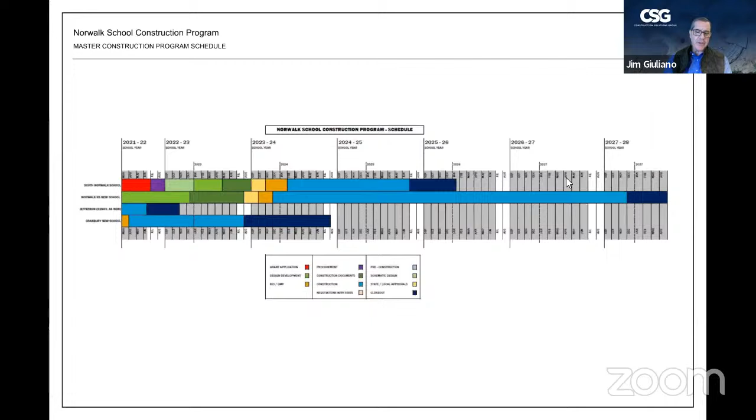The Cranberry project is essentially complete. The school has taken occupancy of Cranberry. We did finish the demolition of the existing school, and right now we're in the process of finishing up site work, which was a new drop-off loop road, parking, and new fields. So there's going to be a new softball field as well as a multi-purpose field, not a full-size soccer field, but one that meets youth level size, in the middle area of the loop drive.

The Cranberry project came about from a renovation project or an addition that Cranberry wanted, to get a cafeteria added on, as well as we wanted to add air conditioning to the project. After we did an initial study and a cost estimate, it was about $17-18 million to do those projects, and it really didn't enhance the rest of the school. It was just really adding a cafeteria and some air conditioning. So we took a closer look at the school and what was really the best use of that money, and decided that a new school built on the same site as the existing school would probably be a better use of the town funds, even though it was more money. It just made sense to replace the old school with a brand new school.

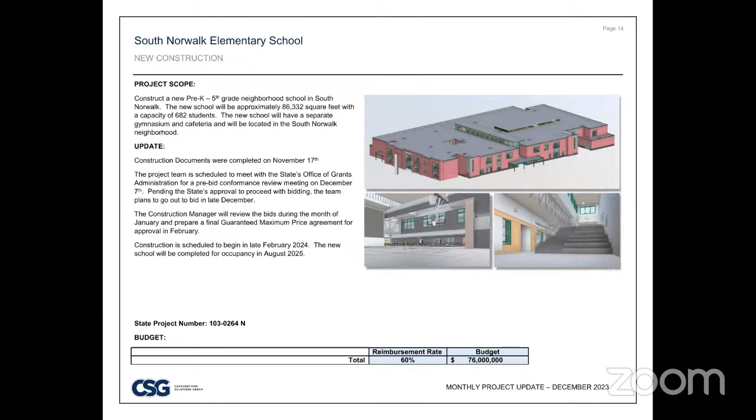I can jump into a couple images now, and maybe that will answer your question. This was an earlier rendering. I wanted to show this one because it's a view of the entire building and kind of the massing, the shape of it. Below are a couple snapshots inside. If we jump to a couple of these renderings, this would be the main entrance to the school. On the left, where you see the canopy, this canopy is the main entrance. On the right here, this is the entrance to the cafeteria.

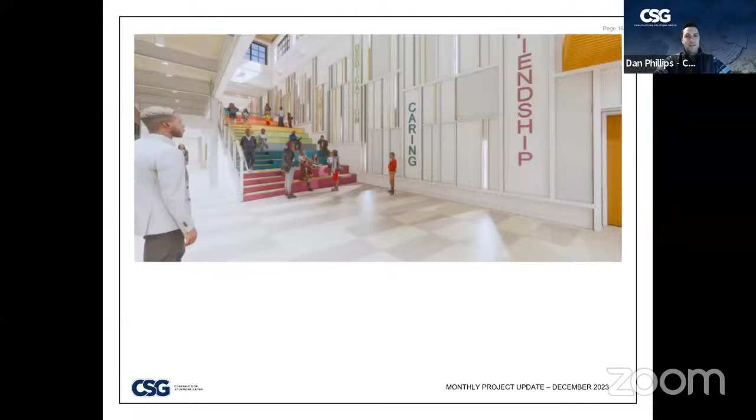This would be the main rendering from the inside of the building, the main stair as you walk through that main entrance to the school. And that's really all I pulled for this meeting.

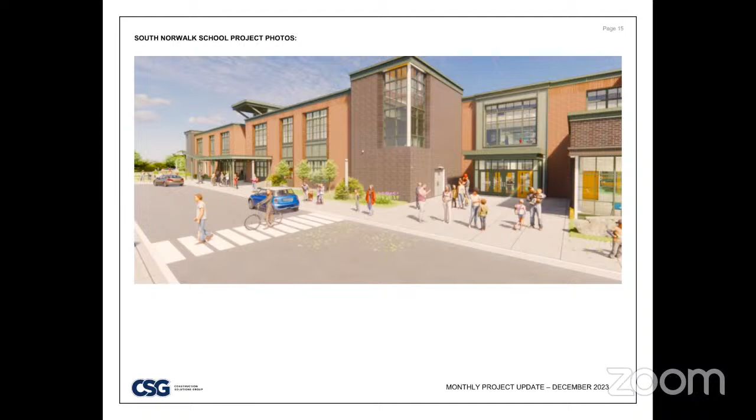I'd like to reiterate my point. Compared to some of our more recent construction, this is quite lackluster. I think it's important that anything we do, we promote equality throughout the city, and that we make sure we are building buildings that are all at the same standard. So even with the three pictures you showed, I'm quite concerned with the lack of beauty and awe these renderings have compared to some of our more recent constructions.

So Dan, these are not completely final renderings? These are final. The project's gone to bid, right? So it's not final. No, it is final. It's final in terms of this is what they are building. This is what the building is going to look like. They are final because they go to the meeting tomorrow. If I heard correctly, they're having the meeting tomorrow. So this is what the building is going to look like.

I don't know, other people might not care or might not have an opinion, but I think it says something. It says something to people that look like me. It says something.

Mr. Freyer: I think I understand what Nicole is saying, but I think part of what we're looking at here is kind of a distortion of what we would actually see. This doesn't look, to me anyway—I'm not an architect, I'm not a designer—terribly different than the description or the pictures of Norwalk High School, just different angles. I think also we're not looking at the inside, and one of the presentations we had seen early on was that the inside of the building was fairly distinct. And looking at the glass here in the front, we had a conversation about that several months ago, where that was kind of innovative, and you don't see that too often.

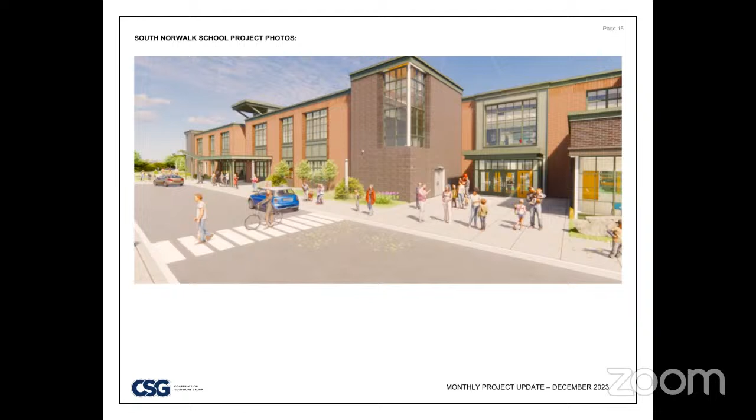Nicole, thank you for your comments and for bringing this to our attention. One thing I want to add is there have been a lot of talks among the Common Council and this committee that we feel strongly it's incumbent upon us to do everything we can, as a city and council, to make this the best school it can be, and to make the area around it the safest and most community oriented. The Public Works Department is involved in improvements around the area, and Transportation, Mobility and Parking is working on traffic, walkability, and safety issues. Thanks for bringing this up. I think we continue doing some research offline and come back to talk about it again next month, if everyone's okay with that.

Okay, Dan, you want to move on?

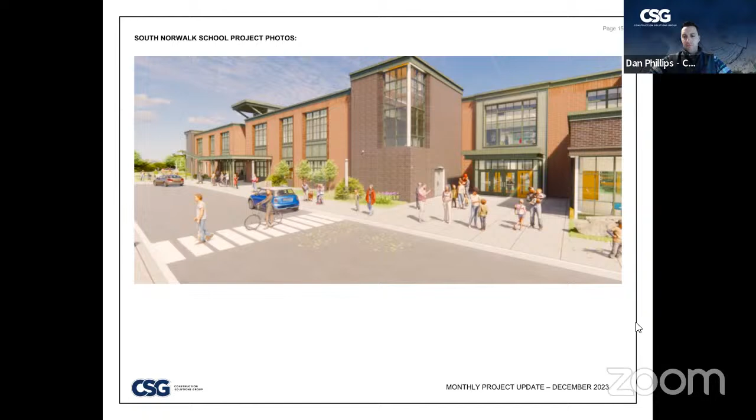Yep, and just before I jump to Norwalk High School, I want to add to Jim's point that this is a single snapshot of the building. We do have renderings from a number of different angles, and we'd be happy to share those or set something up with the design team if that's desired.

Can I just say something about that? On some level I do agree with Nicole that looking industrial for an elementary school is very different than looking industrial for a high school. As much as possible, we could bring some kind of joy to it, and not feel like we're creating a factory system, churning out students as a teacher, which isn't really a great look for any of us. So if there's any way to add a little more joy to it, that would be great.

Thank you for that comment.

Okay, so quickly, Norwalk High School P-TECH update. The construction documents for this project were completed in September. In October, we met with the state for our pre-bid conformance review meeting. We received approval to go out to bid on November 4th. Since then, the project was put out to public bid on November 20th. The current bid due date is January 4th of next year.

From there, the construction manager, it sounds like we're following a similar schedule to South Norwalk at this point. In January, the construction manager will review those bids and prepare a GMP for the project, and that's what will be put forward in February for approval.

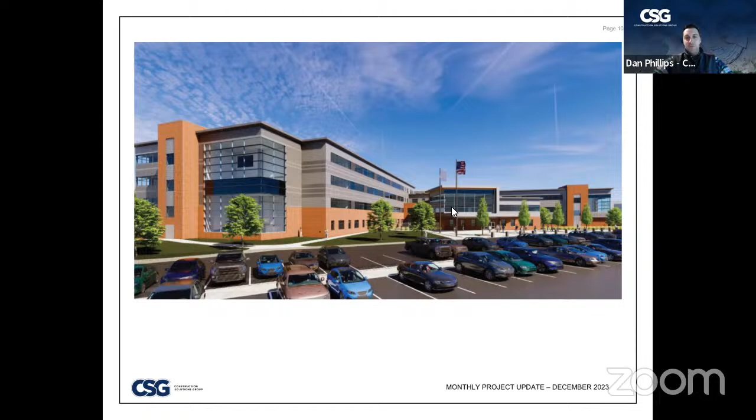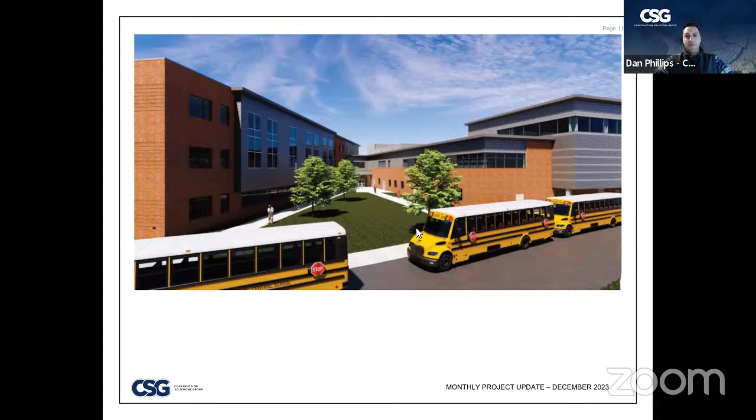Here's a view from the main parking lot. To the left is the Norwalk High School wing, and to the right is the P-Tech wing. In the center is the main entrance with the media center right above it. Off to this side is the school bus drop-off. You can see in the background an entrance that leads right into the common area of the school, at the center. And this would be the rear of the building along King Street.

It's shown here without vegetation, fencing, and other items that would be put in place, but based on community feedback, we understand the importance of that. So it will not be this visible from King Street, but this rendering is intended to show the design of the building.

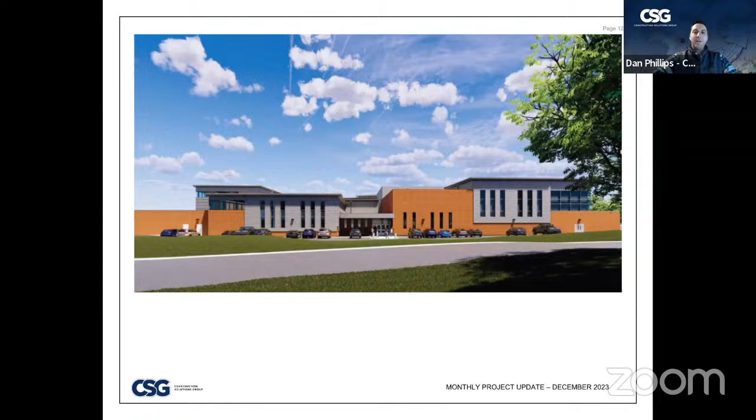And that's the last image we have here for Norwalk High School. Just to recap, the bus drop-off was over on this side to the left of the building, and the rear is the last image I showed. You can see from this picture that it is screened with vegetation along King Street.

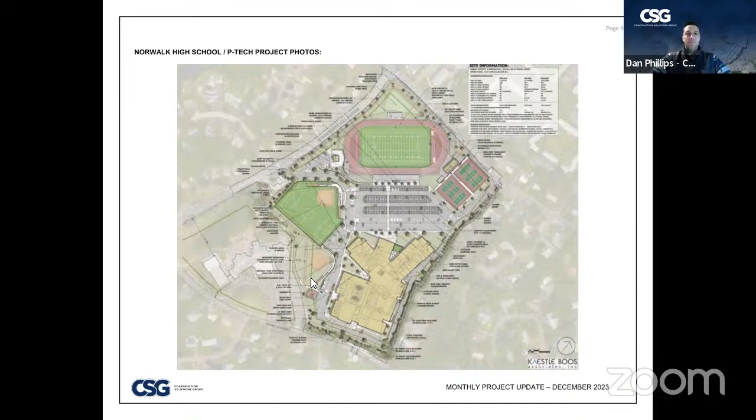Nope, doesn't look like it. I think we more or less covered the Cranbury update, but real quick, a recap of what Jim said earlier.

The school has been occupied since August of this year. After the building was occupied, they demolished the existing building and began to prepare for the new parking lot and field. That parking lot was completed December 18th. Currently the construction manager is spreading topsoil, placing clay on the infield, and installing fencing around that area. The field will be seeded and completed in 2024.

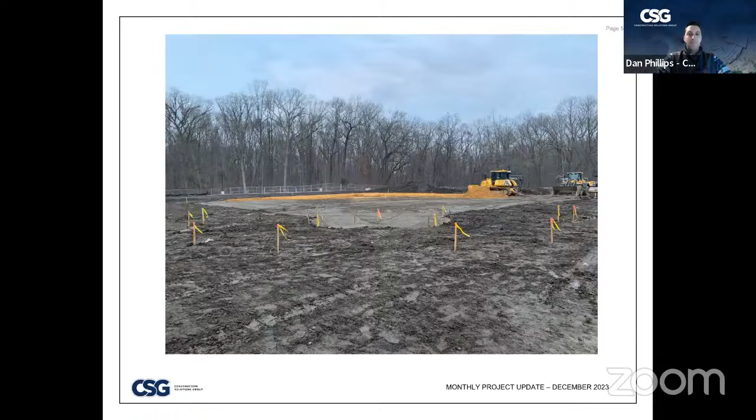And here's just the images again. I think that does it for our construction update.

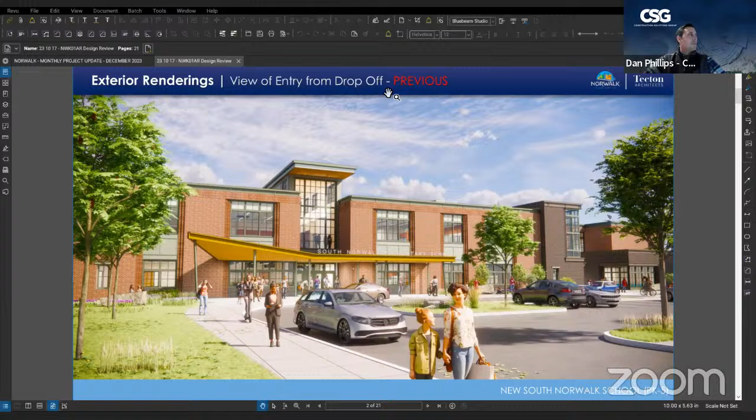Okay, I'll preface this with: I wasn't planning to share this, so I'll just make sure—this was an update to the rendering, so there's a previous and a new one. I'll show what we're showing currently and skip over the previous slides. This is the main entrance to the school, the front canopy, and this is the center main hallway that I showed you a rendering of before, and we'll see again in this presentation. Off to the right is the entrance to the cafeteria.

I don't believe this presentation has a site plan, but you can kind of see it here. This is the drop-off driveway. It comes around the main parking lot, and that's where students would get dropped off and enter the main entrance of the school.

So, previous, new—this is the image I grabbed for the presentation. We'll jump ahead. Again, this is the cafeteria entrance, corridor above, main entrance over here, and this is the parent drop-off.

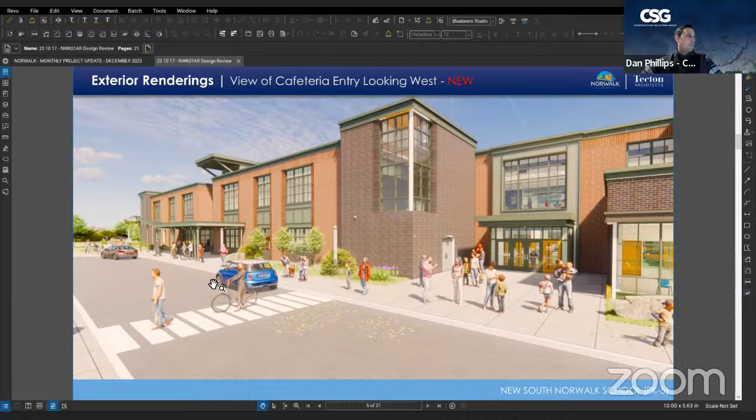This is the rear of the school. Unfortunately, I don't have a site plan to give you the orientation, but this is opposite the main entrance. There's an exit from the cafeteria, an exit from a stairwell, and access from the side of the building. This rear area will have a playground at one end and a playground at the other, and from this point it goes pretty much straight uphill. There will be an access walkway up to the top of the hill, where there will be a multi-use play field.

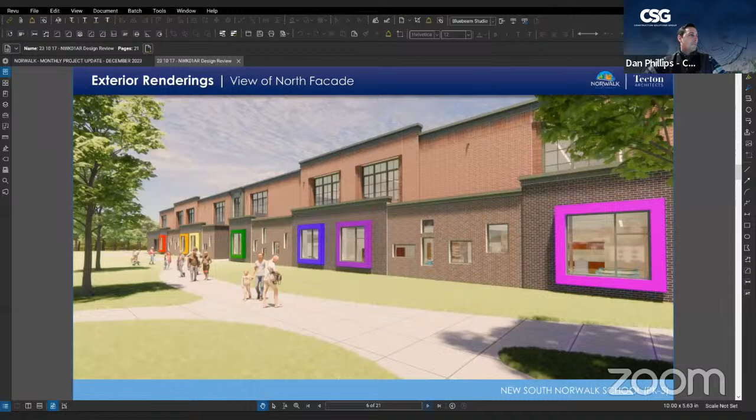This is another view of the rear of the building. Again, this isn't a perfect representation because the playgrounds and outdoor learning spaces aren't shown in this rendering. It was intended to show the shape of the building and the finishes, to get a feel for the building more so than the site.

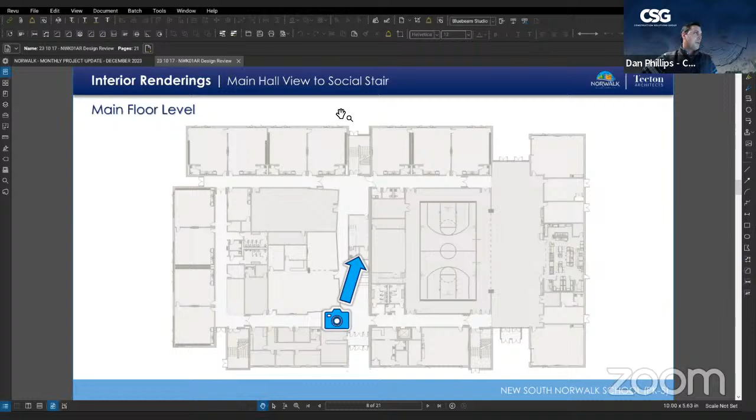These are the pre-K and kindergarten classrooms in the rear, and that's where that image was taken from. Again, this is that main corridor as you enter through the entrance to the building. There's stairs, and there's kind of a bleacher setup for education presentations.

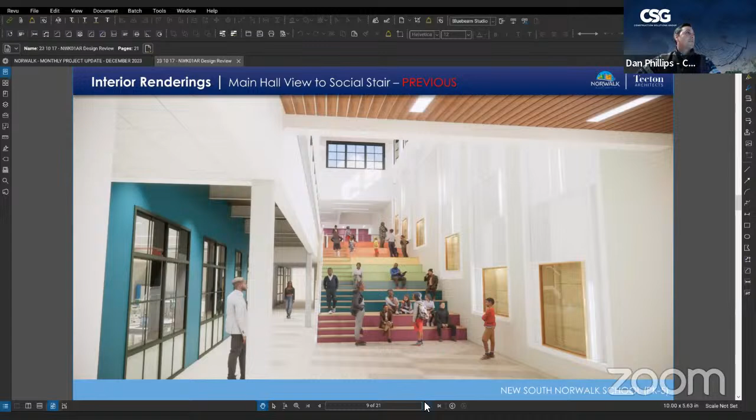This is actually, my apologies, the previous design. So this is the current design for that corridor. Make sure I jump over the previous one. So here's another angle of that corridor, the stairs - that's the main stair with lighting around the entire top.

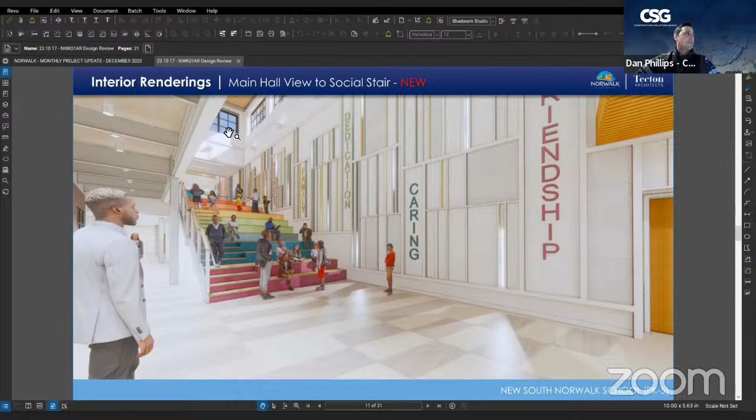As you may recall, above the main entrance is south facing, so that's all glass, and a lot of natural light will make its way into the center core of the building.

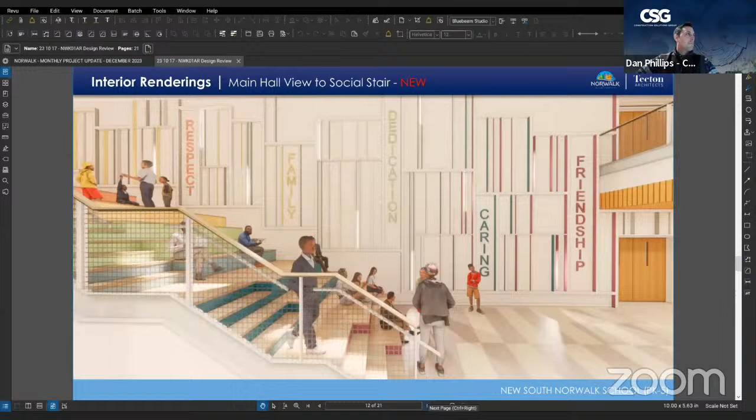As we get upstairs, here's that glass overlooking the main parking lot. Here's an opening, colorful walls, and a couple different spaces in the core of the building, whether it's offices, media, and other uses.

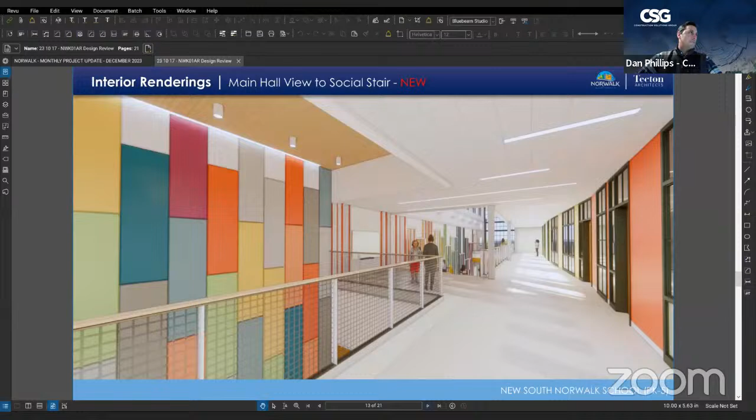Another image of that stair. And here's now an image looking into the multi-purpose room at the center of the building on the second floor. Here's the multi-purpose room.

Next image will show the gym and cafeteria, and you might be able to see here this accordion wall that opens and closes. That allows for larger events with the stage on this side of the gym that can be opened up and expanded into the cafeteria.

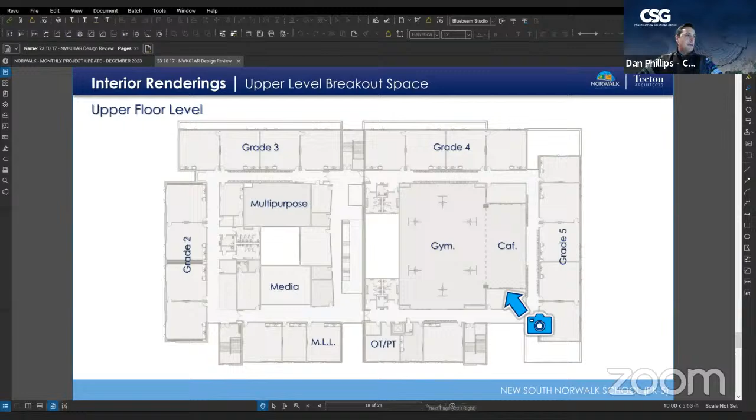Being an elementary school gym, it's not the largest, but that allows extra capacity and viewing for events. It would remain closed for cafeteria and gym classes during the day, but there's an option to open it.

Here is the second floor. This is one of the breakout learning spaces in the corridors. There's glazing looking down into the media space.

Another angle - actually, we're on the other end of the school now, so this is looking down into the gym. And those are the other renderings that I had at my fingertips to share.

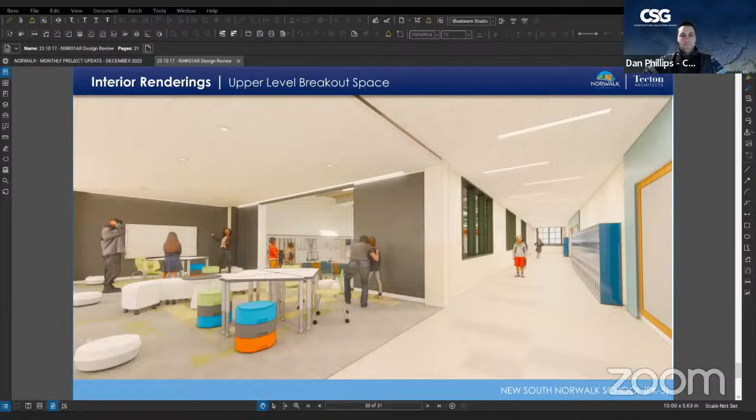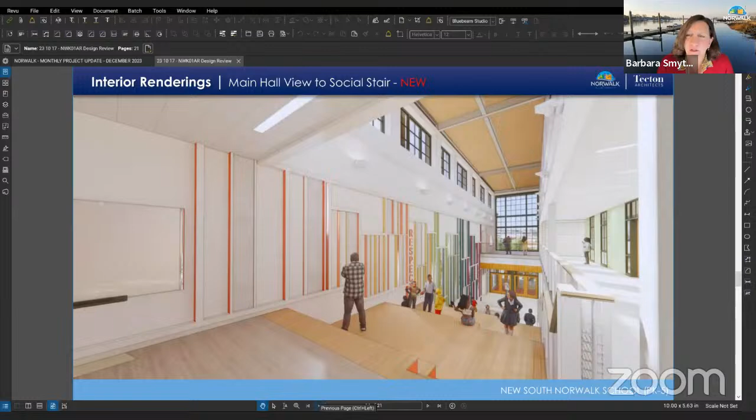Thank you, Dan. Yeah, we have seen these renderings in previous land use and building management meetings. I think that when I first saw that front entrance, I think that probably should have been the first rendering you showed us, Dan, because that's really quite lovely. The side view is not so lovely.

Given that we have such a time constraint, Ms. Ayers, I'd just like to hear if you feel a little bit better about seeing this rendering, the front entrance, with the idea of some additional plantings and things. It didn't want to get off mute - I do apologize for the delay.

No, this does not ease me. It looks like the platform, which are South Norwalk apartments, luxury apartments that people that live in South Norwalk can't afford. No, these renderings do not make me feel better.

I have a procedural question as a follow-up from what Council person Burnett asked. So if I'm understanding the process, you're saying that we can't make any alterations to this building because it has to go to the state tomorrow to be approved, and if we make any alterations, it will not be approved. I have a problem with that because we made alterations to Norwalk High and those plans got approved.

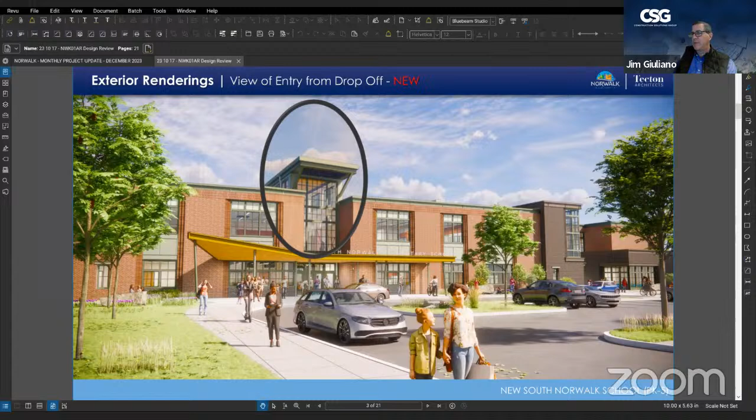Can I ask, can someone talk about the meetings that were held? I know, again, I was not on this committee. I know Ms. Young was, I believe Ms. Revolus too, and my understanding is there was a lot of community discussion with the District B representatives. Can someone talk about that community outreach and that process?

Madam Chair, my hand was up—we were not finished. Oh, I'm sorry, Nicole. Sorry, go ahead, we were not finished.

Go ahead. I appreciate the consultants bringing up the other projects, but I have to say this: even if it's a square, it should be the best square we can give somebody. What I have currently seen in those renderings—I've seen you guys do better work. I really have. Those renderings do not bring anybody, at least they don't give me any ease. They don't speak creativity or a place of learning for anybody.

It looks like a downtown area. It doesn't look like a school. It doesn't have the feel of a school. So I'll just say this, and you can continue with the chairperson's questions or whatever. If we're voting on tonight—which I think is what's on the floor—for this body to be the committee for land use of this particular project, I'm not in support of it. Not because I'm not in support of the project, but because I know you guys can do better work, since I've seen you do better work.

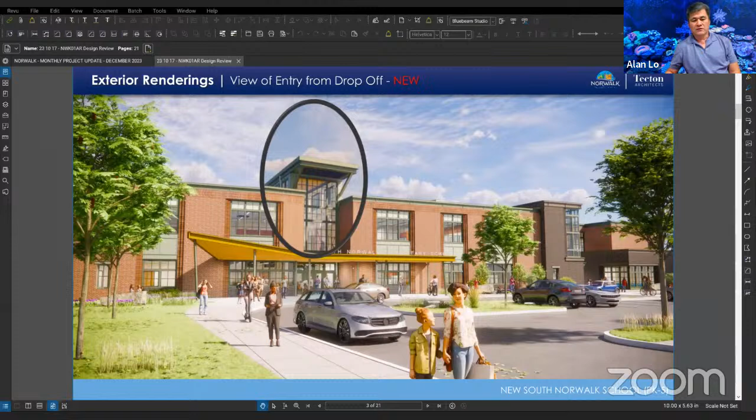But you want to change the color of the brick, you want to change this canopy, instead of pitching out like this, or yellow, you change a different color, even a trim color - that's not a problem, right? The state doesn't look at it as, oh, you changed the color of the building, or the window is a little smaller or bigger, whatever it is. But...

Generally speaking, the shape of the building, we can't change the building to a circular shape, because it changes the whole design structurally and everything else. So we're really starting from the beginning. Except the programming side, you actually redesign the whole building.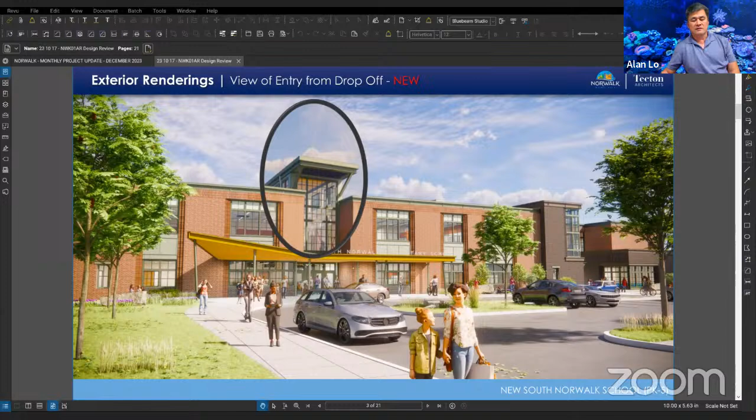But if we want to change potentially, like again, it's a brick color building, you want to change the color of the brick - that's not a problem, we can change things. But in terms of styling of the building, in terms of like, okay, I wanted a metal panel, well then it's a substantial change, and we have to stop the process, kind of thing.

So again, putting more trees or putting more different colors on the building, that's not a problem. So when I say that we can't change it, it means structurally, and the way the building design is, that's not changing - but the fenestration could change, right? The question is how long does it take if you want to change to a totally different style of building.

I have one more question. So along with color palette and stuff like that - I mean, there's things that I understand the structure - but wayfinding signage, none of that's on there, other than I did see you put the title of the school over the overhang.

Yeah, is there any of that - I know, like when a building's done, afterwards they come back and ask for signage. Yeah, there's a signage package for the interior of the building. And I think this is an earlier rendering. Today's standards, we do not put the name of the building on the building anymore, because schools have a tendency to change the name. Sometimes they change the name to a magnet school, or the way things go.

So we're actually not putting names on a building anymore, because the board of education has a tendency to change programming and stuff for the building, and they want to change the name. So doing it outside on the building is very difficult, because you put holes in the building for signage. So what we do is ground signs - that's what we're doing in terms of naming the building. Norwalk High School, similar - originally we had thought about calling it P-Tech and Norwalk High School, but it got a little complicated, and also any changes are much more difficult.